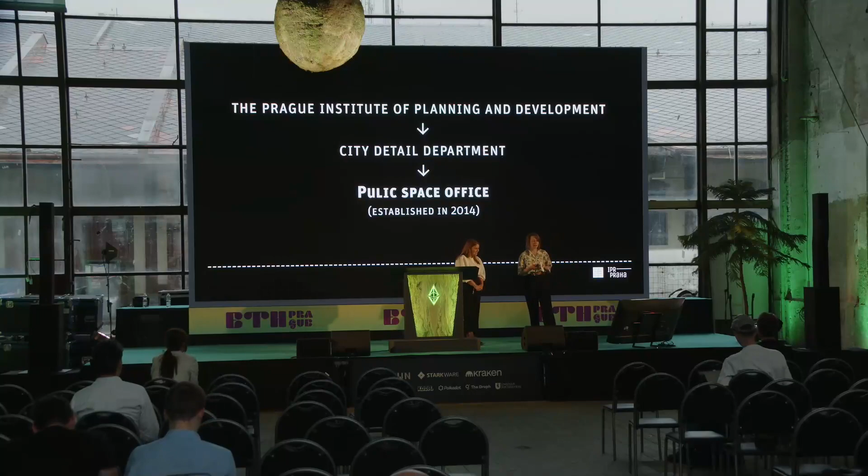So just a little bit about our background. Our institute is a contributory organization of the city, and we are part of Public Space Office, as I said before, and the office was established around 10 years ago as a part of City Detail Department. So what we are doing in our office, we are usually creating analysis, some strategic methodic documents. We are also commenting and making pronouncements on intended projects like public ones and also private ones.

We are educating public, and we consider it as really important. So we are doing commented walks for children, for students, for normal public, and we are doing some lectures like this one. And above all, we are working on public design projects. It's starting from small pilot projects to city-wide projects. And it means we are doing coordination, we are also designing, and we are doing competitions or competitive dialogues.

So in the beginning, we should ask ourselves what is public space. The public space is a space which is typically owned by the public. It means by the state or by municipality. It should be something where you feel safe, where you feel included. So I said that public space is something like a living room of the city, where you can join and feel comfortable.

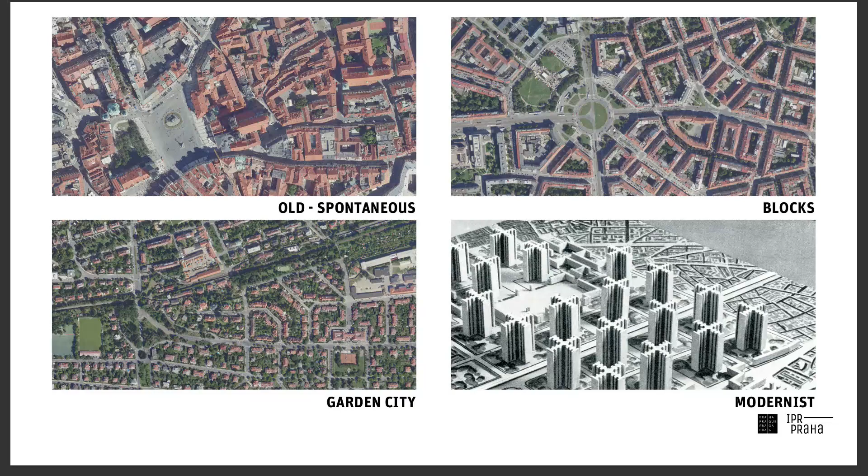Just for a context of public space, we have many typologies of the city, so just few of them. The first one is old, spontaneous, usually old town of the city, like almost in every European city. The second one is city of blocks, typical for Barcelona and also for Dejvice and Letná in Prague. And the block city is from the beginning of 20th century, and also from this time is an idea of garden city. A lot of villas in gardens, and then we have modernist city, which means housing estate, very often in Eastern Europe from socialist era, but we have a few projects in France as well.

And also we started to be very car dependent. It means you need a lot of space, because according to the type of transport you are using, you need some space for you. And if it's a car, it's much bigger than if you are a pedestrian, cyclist, or you are using public transport.

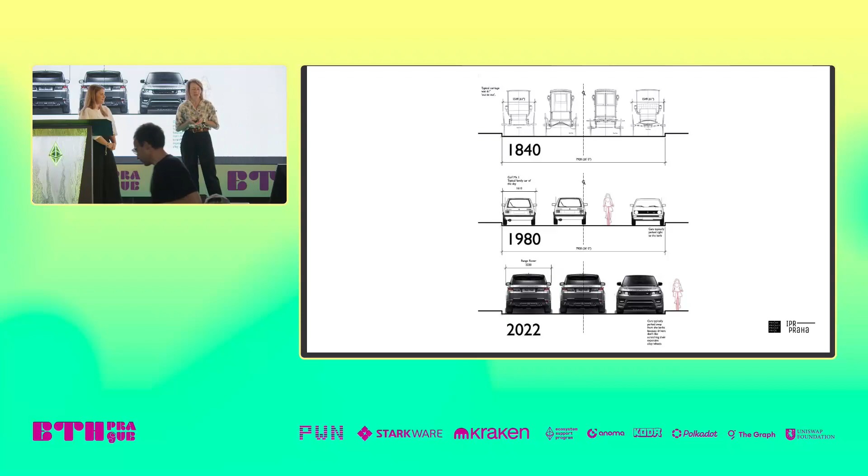I have a quick question for you, and because we say sitting is the new smoking, I would like to ask you, please stand up, who used to play outside during childhood. And please stay standing, who would be okay if your child would play outside the whole afternoon somewhere in the city. Okay, thank you.

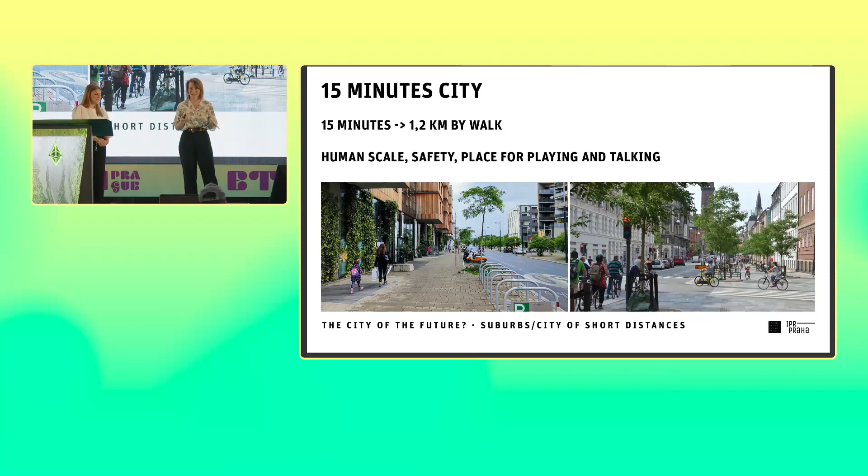So we have an idea of 15-minute city, which is also very secure for children. It's a city where you have everything around 1.2 kilometers by walk from your home. Everything is in human scale. You feel secure there. You have a place for children for playing, talking, meeting your neighbors. You can go to a cafe or to a shop or something. So this is a city of future, or we consider it as a city of future. And also you need good public transport in a 15-minute city.

Yes, sometimes it's super complicated to make a well-designed public space because, as you can see, there are a lot of needs we want from the public space. So for me, the most important is flexibility, because the public space develops with its users. So every year it can be different because we have different needs.

So sometimes it's really difficult to design it, because sometimes our priority is something different, like a parking place and our supermarkets. So we are trying our best in the public space office, and I think it's also important to feel safe and to feel free in the public space.

And it's also really important to make livable streets, because public space is not just the squares, it's not just the playgrounds or parks, it's also the streets and everything that is included, like pedestrian crossings and so on. So most of the time we focus on it.

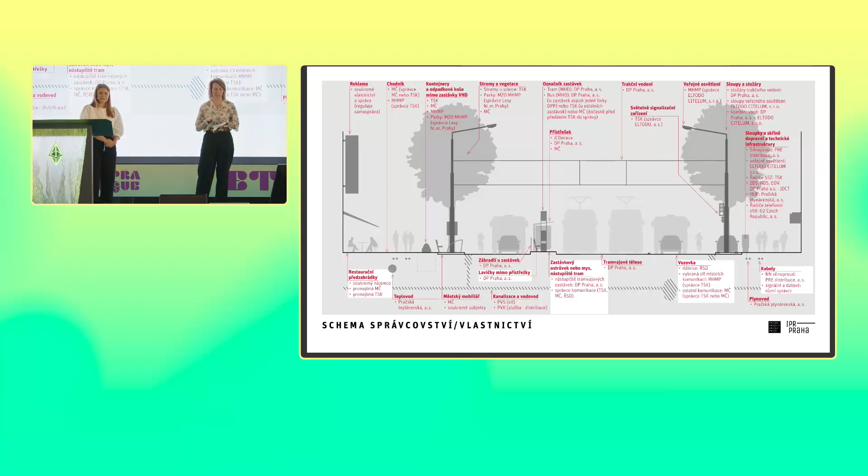So we decided to create some strategic documents. Probably the most famous and respected one is the Prague Public Space Design Manual, and I'll just show you a few principles we use in this manual. I just want to say you can download the English version from our website, so if you want, you can use it in your city.

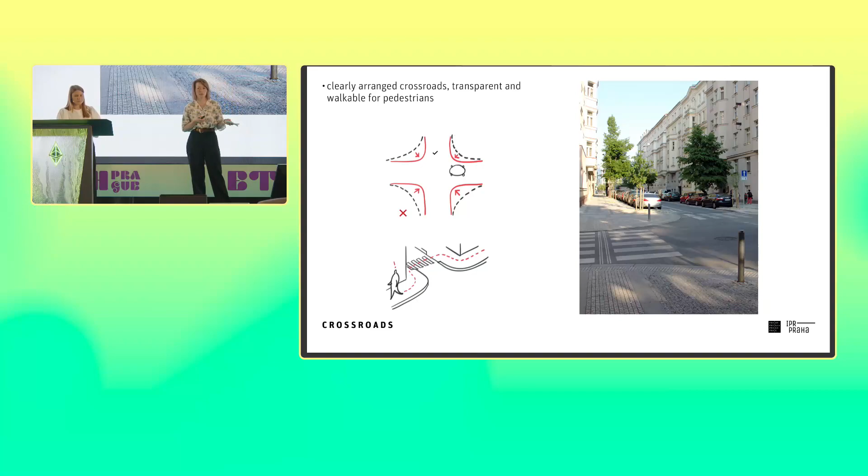So the first principle is you need a really wide sidewalk with zoning, so you have a place for cafes, then a place for walking and strolling, and then a place for trees, benches, bicycle stands, etc. The second principle is you need a clearly arranged crossroad, so pedestrians have a transparent view and also walk in a straight line.

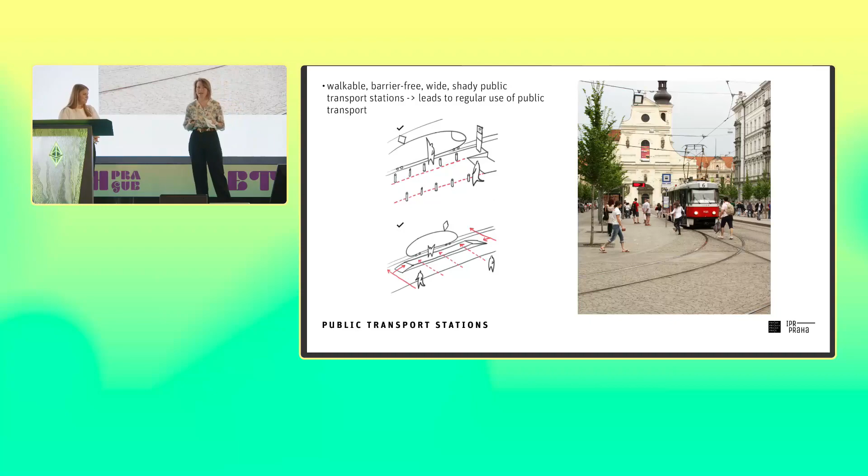Another principle, you need walkable, barrier-free, shady public transport stations, because it leads to regular use of public transport instead of cars. Of course, it's necessary to have separated bike lanes, and it means you need really safe bike lanes for everybody, for children, for people on shared bikes, and not only for fast bicycle guys.

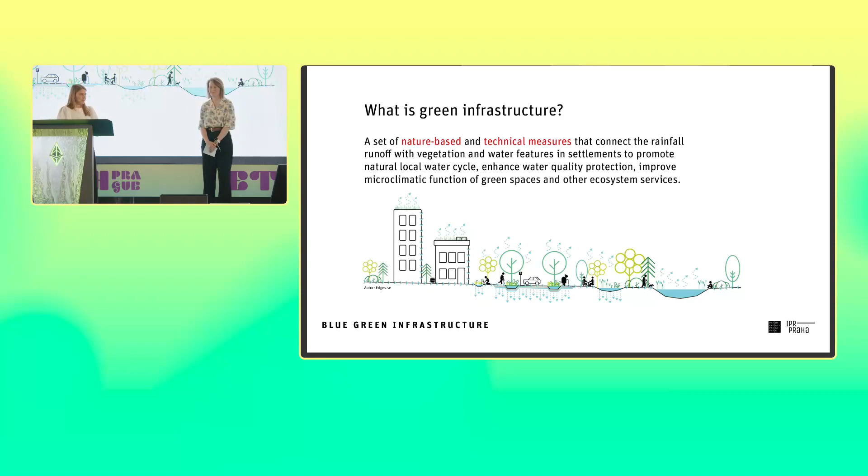Yeah, really typical picture. The green infrastructure is super important for comfortable living in the city. In the shadow, you feel better. In the summertime, the temperature can be, I think, more than 10 degrees lower when you are close to trees. And of course trees clean the air and make the place quiet and so on.

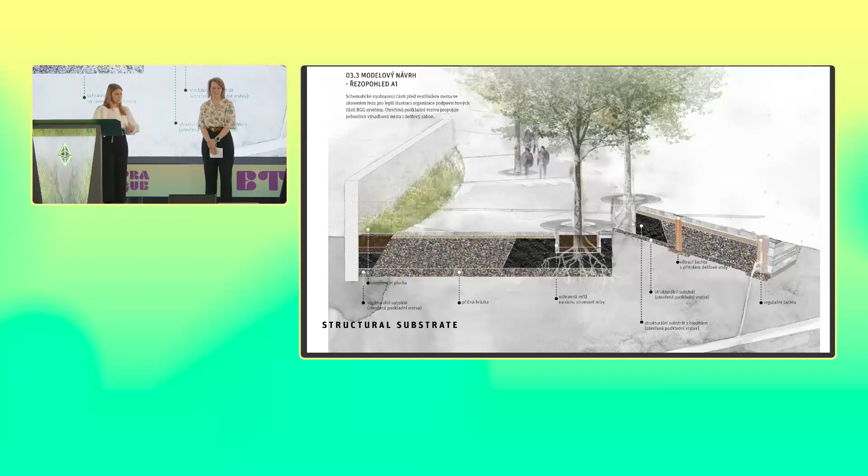This unique system is based on an open base layer and structural substrate of stone that allows the rainwater to reach the roots, and it worked well. We have a few realizations in Prague already, and this is absolutely genius because the stones are without zero fraction, so the trees can breathe and the water can flow to the root system. This is how it looks. And this is Smetanovo nábřeží. We have already seen it, and this is a good example of how to plant trees in the city. The whole system is connected, so the roots can touch each other.

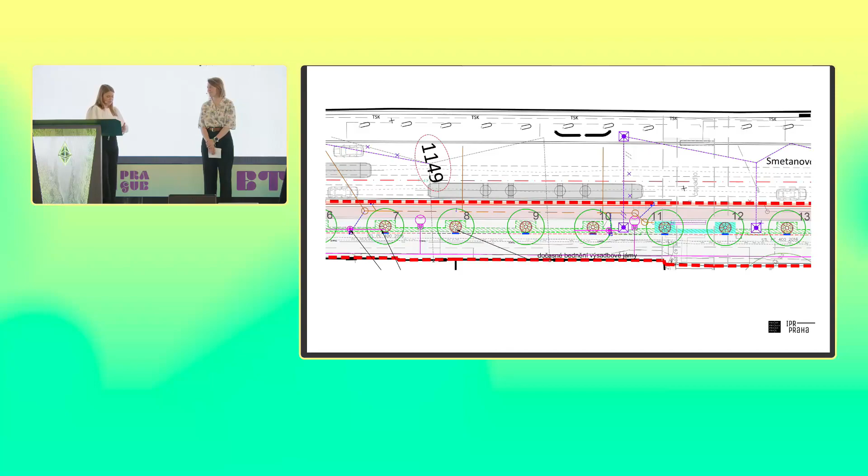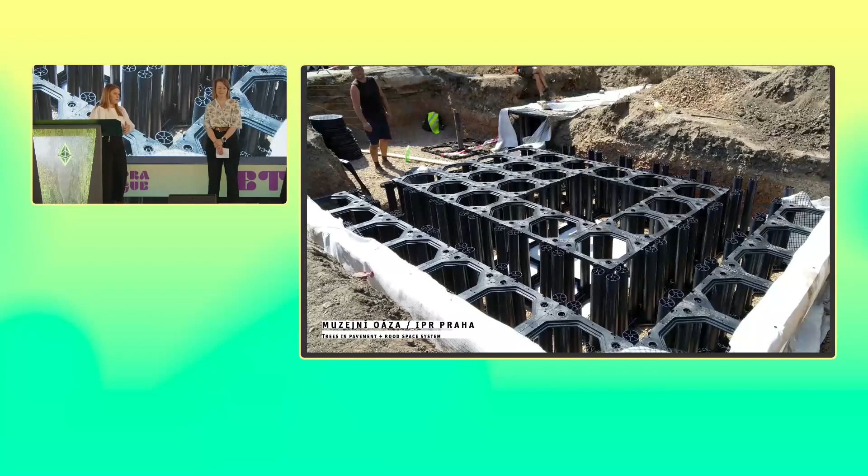And maybe you know the project around the Prague Museum. There a system with these root boxes was used. It's also good, but it's much more expensive than the Swedish system. But we have a choice. It depends on the place where we design. And these boxes were also used in the main square, Václavské náměstí. And I'm manager of the following revitalization of Karlovo náměstí, Charles Square, and we are preparing a really special project with water management and with a management plan, which is really important for the park in the following years.